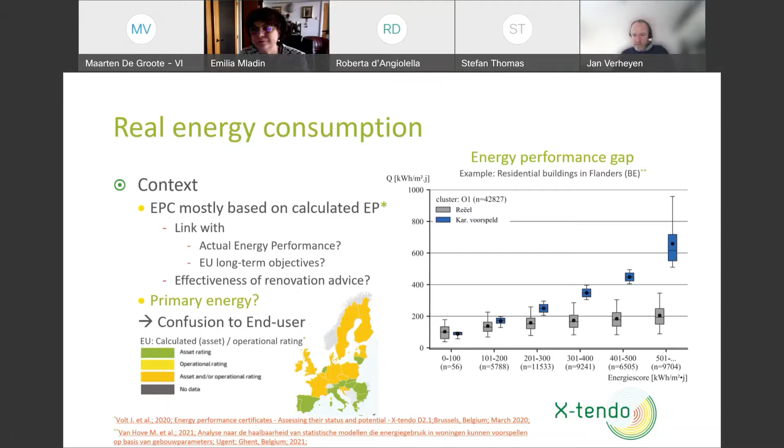So how does this real energy consumption relate to the ongoing revision of the EPBD? Two months ago, a proposal of the revised version of the EPBD was published by the European Commission, and it should be stated that it still concerns a proposal, as it still needs to go through Council and Parliament, but it already gives a good insight into the directions that are envisioned.

The EPBD recast is part of the Fit for 55 package and has two main objectives: first, to reduce building greenhouse gas emissions and final energy consumption, and also to establish a long-term vision for buildings with adequate contributions to 2050 climate neutrality.

Related to real energy consumption, there are two main elements in the proposal. First, the energy performance can be based on calculated or measured amount of energy. It is noteworthy that the terminology has altered from measured to metered - I do not know the exact reason for that. It also concerns the energy use associated with a typical use of the building, and the methodology should ensure representation of actual operating conditions.

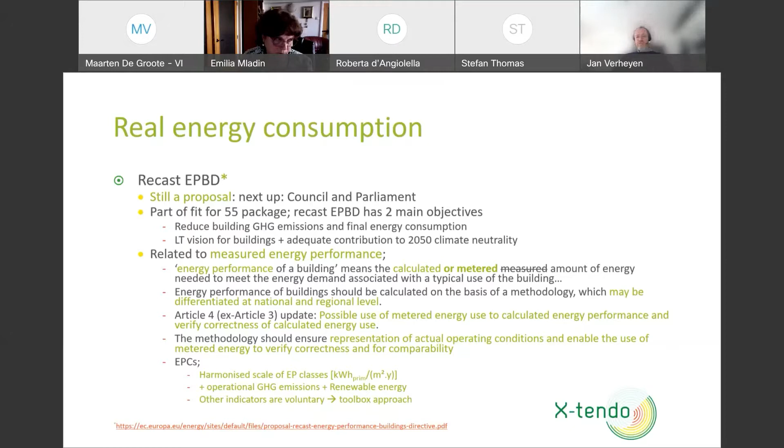I will come back to the main outcomes of this scoping analysis in relation to real energy consumption in the following slides. For quality safeguarding throughout the development process, the methodologies are evaluated against 4 cross-cutting criteria: quality and reliability, user-friendliness, economic feasibility, and consistency with international standards. Several dedicated expert experience exchange meetings were held and interviews with experts were organized. An extensive reviewing process is maintained, including 2 internal reviews and 1 upcoming external review.

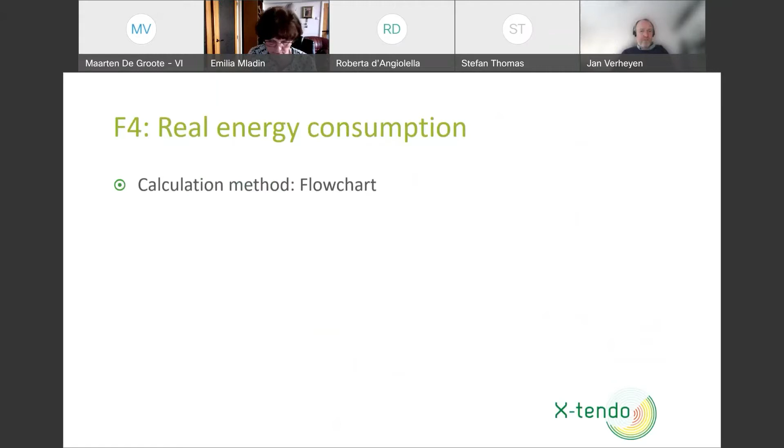Let's now have a closer look at the calculation method, the flow chart of the calculation procedure.

As an input, there is case-specific data to be provided by the EPC practitioners. Firstly, related to the building: some general information, the type of building, and the useful floor area. Then specific data from monitoring is required. This, in fact, is the main input to the method, and it concerns energy delivered or exported per energy carrier and per application.

And then also, depending on the options chosen in the methodology, input related to the use is to be inserted, more specifically aspects related to indoor temperature and domestic hot water.

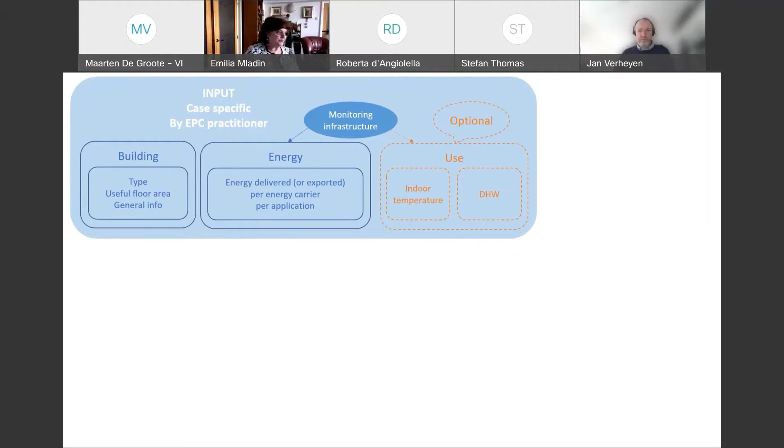So that is the case-specific input, but also on a higher level, data needs to be provided by the member states, related to the context and the model, such as model options, weighting factors, climatic data, and data related to standard use. But for all of this data and information, defaults are provided in the methodology in case national or regional data are not available.

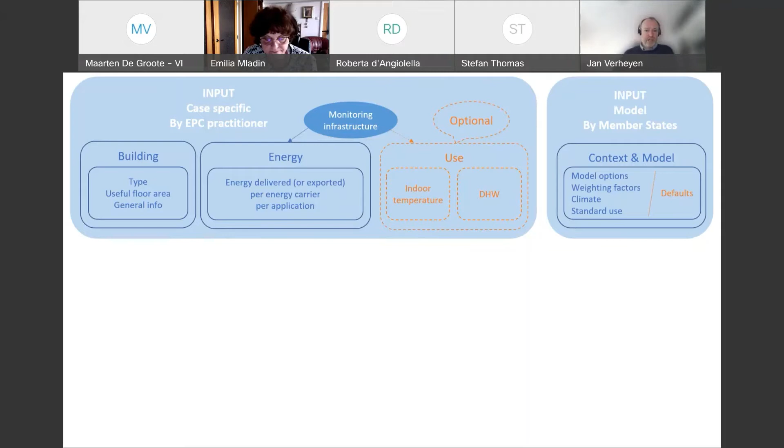So then in the next step, based on all this information, the calculation is done firstly by calculating correction factors to deduce the standard inputs. Then based on that, the standard energy delivered and exported is calculated, and then from the energy balance, the energy performance indicators are calculated in the last step.

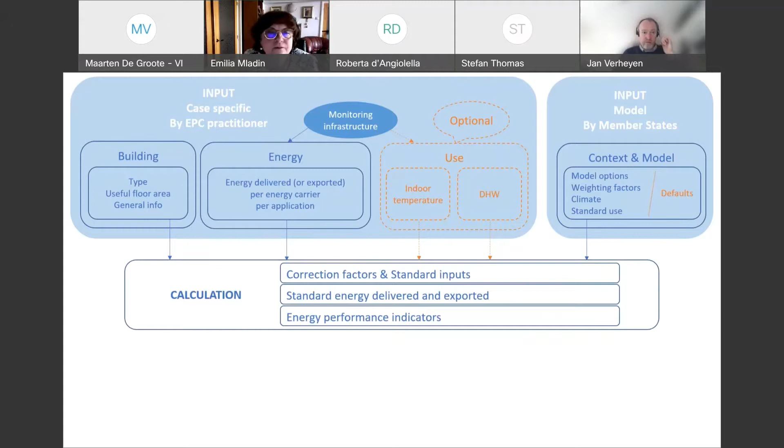So together with information directly adopted from the inputs, the output is generated with general information on building and model options that is repeated for information services. And then also the measured energy performance indicators are reported on. This is the energy delivered and exported on the final level, corrected for standard use and climate. And then the energy performance indicators: CO2 emissions and renewable energy ratio. We will come back to that in a second.

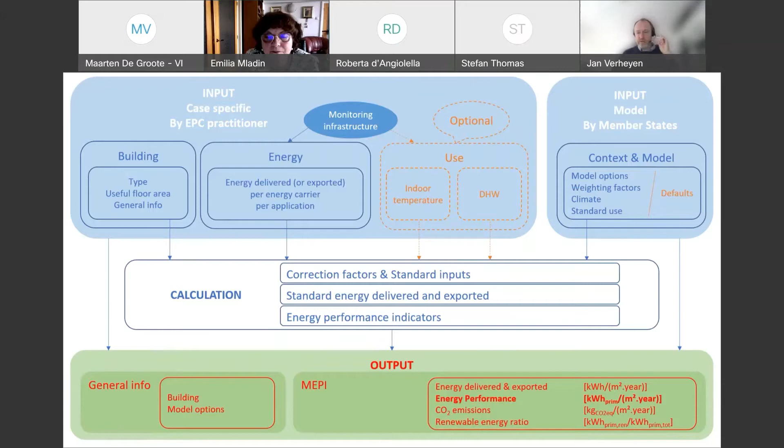But let's have first a look at the main input.

A lot of thought went into this, and the data input structure of this calculation tool is established in a generic manner, meaning that it allows as much as possible input of the variety of buildings and system architectures as can be found in the EU building stock. At the same time, this main input matrix structure is limited to what is minimally needed to do the most essential corrections, as mentioned prior in this presentation, to enable building comparison and comparison over time.

It does have a consequence: the input requires the presence of monitoring infrastructure. This may consist of electricity, gas, oil, heat meters, or several of those, and the number, type, and location of these meters all depend on the system and building architectural configuration.

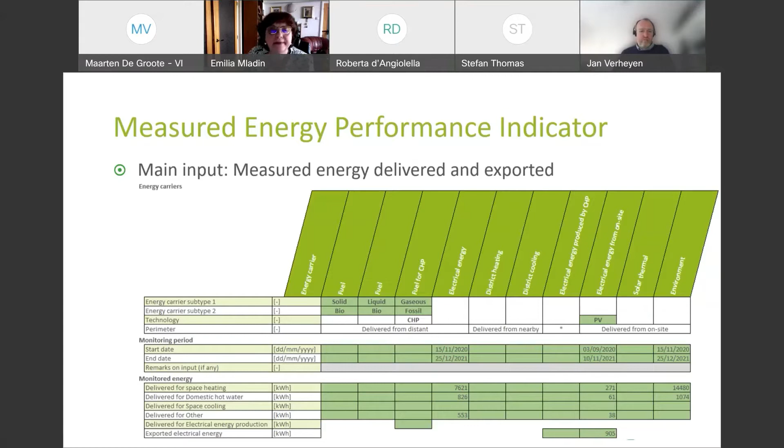Maybe a bit more clarification. The method was established in this manner as it is expected that the availability and quality of low-cost sensor devices will increase substantially in the upcoming years. Nevertheless, it was acknowledged within the X-tendo consortium that the required monitoring infrastructure in most cases is not present in the existing building stock. So that's why we decided to complement the calculation tool as it is presented today with a report that describes options that can be used in cases where only a limited amount of information is available. This publication of the additional report is expected in the upcoming period.

After these inputs have been done, corrections are done, and these concern corrections to standard outdoor temperature, solar irradiation, domestic hot water use, and indoor temperature in the heating season.

Only the first correction, to outdoor temperature, is implemented by default and is based on the heating degree days and cooling degree days method. The other ones can be chosen optionally. This can be done on the level of the member state, or they can choose to leave the option open to the expert EPC practitioners to decide whether or not to include it in the calculation procedure.

So again, these corrections are implemented to allow for inter-building comparison and comparison over time.

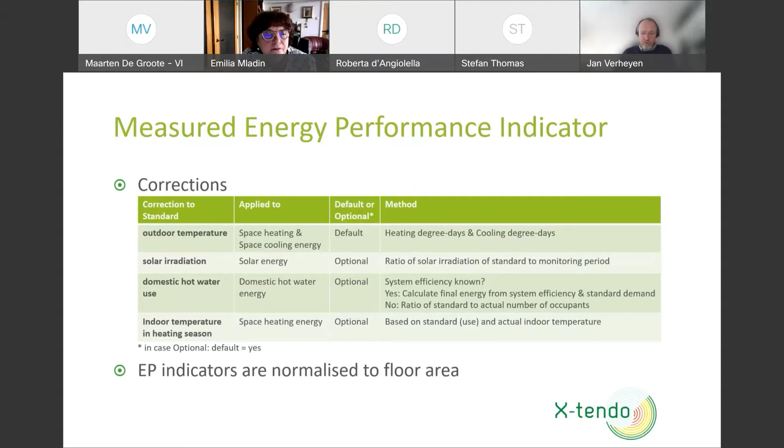The output is then normalized to floor area, and these are the indicators that are all reported on in the output. So the main output consists of standard measured final energy delivered and exported.

It is reported on in a similar matrix as the input matrix, only here it includes the final energy delivered and exported corrected to standard conditions of climate and use, and totals per energy carrier and per application are also given, which would allow end users to compare the values reported with their billing information, which is important as this is of high interest to the end user.

Next to that, several energy performance indicators are reported. I will briefly go through them. The main indicator is the energy performance expressed as primary energy. That's the one in the table on top row.

And there are several variants for this indicator. The first one is the non-renewable energy performance. For the non-renewable energy performance, there are 3 variants. The top one is for the case the on-site produced electrical energy is not taken into account. The second one only takes the self-used part of the total on-site produced electrical energy into account, not the exported part. And the third variant takes all, both self-used and exported part of the on-site produced electrical energy, into account.

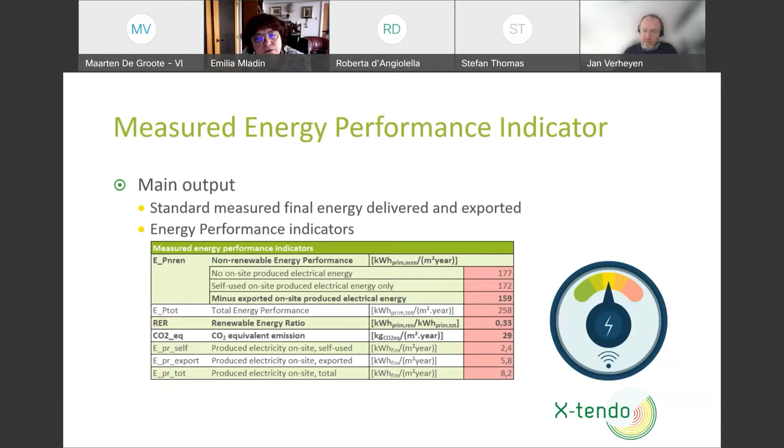Important to note is that member states' implementing bodies can choose from all of these outputs which ones to include in the EPCs. This can be done in line with their national context and existing practices. Also noteworthy is that the ones indicated here in bold in the table are the default ones suggested by the European standard EN 52000-1. These could be considered as the default options for member states if they do not have preferences in making this choice.

So the MEPI method, the measured energy performance indicator, can be applied to both single-family houses and multifamily houses, on the level of an apartment unit or for the entire multifamily house. It can also be applied for all types of non-residential buildings, such as offices, educational buildings, healthcare facilities, and so on. Public buildings are also in the scope. Only industrial buildings are not in the scope, which is in line with the general EPBD approaches.

As mentioned, it does require monitoring infrastructure, and as also mentioned previously, an additional report is being expected soon.

So the main benefits are related to the aspects of user friendliness and quality and reliability. We have presented these in an earlier slide, so we will not go over them again.

For the next steps to conclude this presentation, currently in-building testing has been finalized, and it has been done in 4 different EU countries on different building types. Maybe noteworthy to mention is that most, I think all, of these buildings do not have the detailed monitoring infrastructure installed that is required to apply the MEPI methodology.

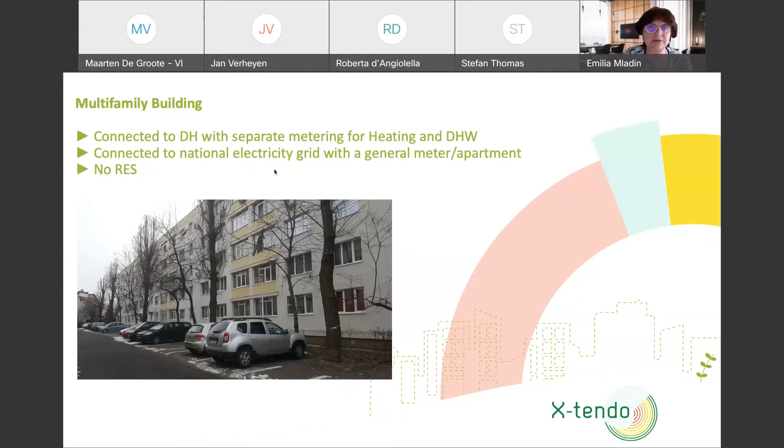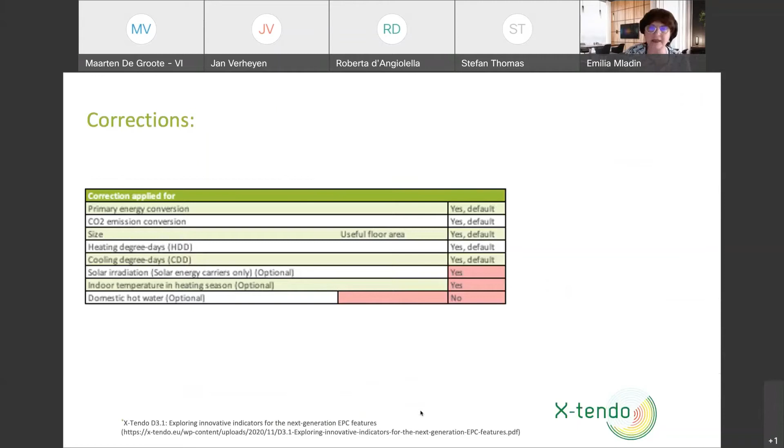What Jan presented, I will go quickly over the summary building input that contains information about the building, the size, the address, and the consumption input into the tool for almost a full year, to be representative of the building, along with the known system efficiency. So basic input, and then the corrections chosen for these real energy values, the results, and the energy performance results that Jan also presented, which can be chosen to be included in the EPC. These values may be very different from the calculated ones, but I will comment on this later.

For the single family building, I chose a house that was finished, but you can still see some outdoor works going on. I chose this house because it has renewable energy sources like PV panels on the roof. You see here there are two systems, one on-grid, one off-grid with batteries, along with a building energy management system for the house to deal with energy supplied from different sources, local and the grid.

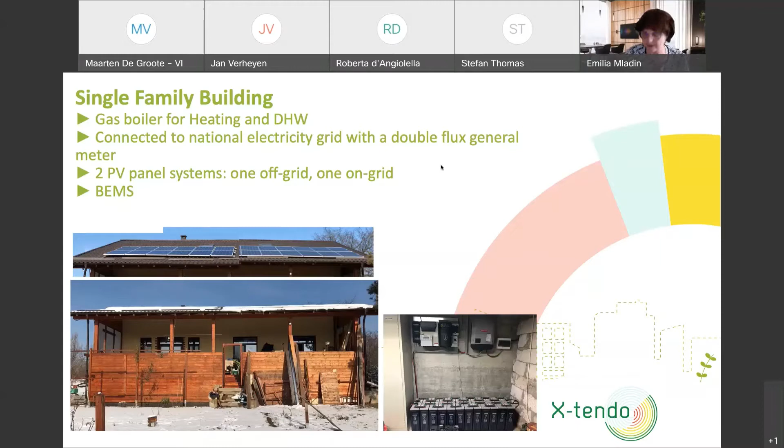Which were the barriers in implementation on the market? Here I have some comments that may influence the usability of real energy consumptions. Unavailability of submetering per energy use or application requires some simplification when trying to separate by application, because by energy carrier it's not that difficult.

Most buildings have meters for fuel, for district heating, or for electricity produced or used from the grid, but submetering per application is extremely rare.

Lighting for non-residential is not included in the applications and may be an important consumption, especially for non-residential buildings. There's also significant impact of user behavior, like comfort level, presence or absence in the building, and education for not wasting energy.